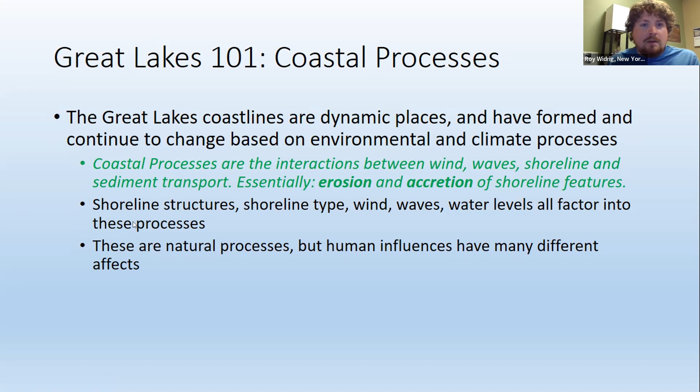and we'll move on. So why do these processes matter? Really, there's a lot of connections on the shoreline, both ecological and geological, and we want to conserve the shoreline environment to make sure that the processes are functioning as they should be, because what's happening at one shoreline is going to affect what's happening up and down drift. And when I say down drift, that's the way the sediment is usually moving along the shoreline. We want to maintain those processes. We want to limit a lot of other byproducts of these processes, such as wave deflection, scour at the base of structures, and so on.

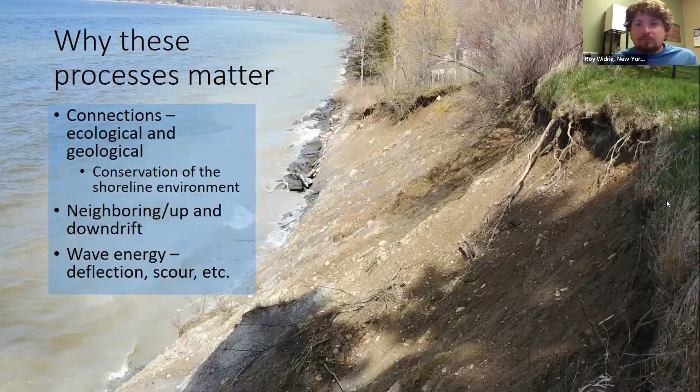So scour is usually that process where the waves come in, they hit a vertical wall and they kind of mine underneath or in front of the structure. So that's one thing we want to do, both for the structural integrity of the walls, if they are in place as a wall or other type of shoreline revetment, but also because by preventing scour, we can maintain a beach out in front of a property or a natural area.

When I refer to obstruction, I mean kind of what's in this upper left of the lower diagram there. When we build perpendicular out into the lake, we could often trap sediment in one area, and that means that down drift, not so much the current, but the process of down drift. But we want to make sure that all of the beaches and shorelines are receiving all that sediment. So that's a big factor.

Reflection is also very big, because when you have a situation where one stretch of property is protected by a large wall or revetment, neighboring properties can also see issues with that by receiving that reflected erosion. And when I do site visits with property owners, that's what I often see. Someone builds a wall, but the neighboring property starts to erode much quicker.

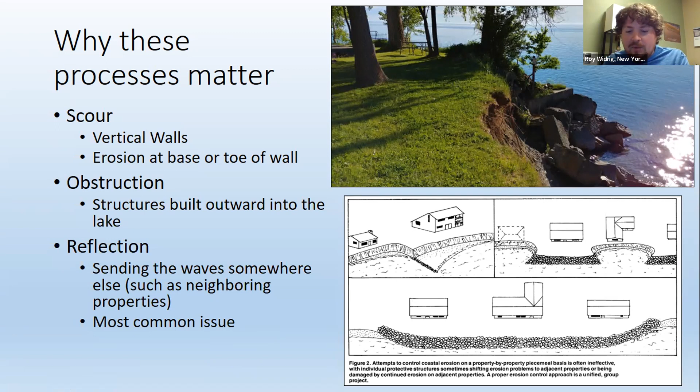All right, so we're going to talk about shoreline types, and this is really where my specialty is, the coastal geology and the processes, and how we want to maintain certain processes on the lake shore. So Lake Erie is really mostly known for, and what I see a lot of coming from the residents, is bedrock cliffs, mostly shale and kind of this limestone type sediments. The erosion resistance of these is very high where the rock is exposed. I don't see a whole lot of erosion of the rock itself, except for freeze thaw, cracking, and so on.

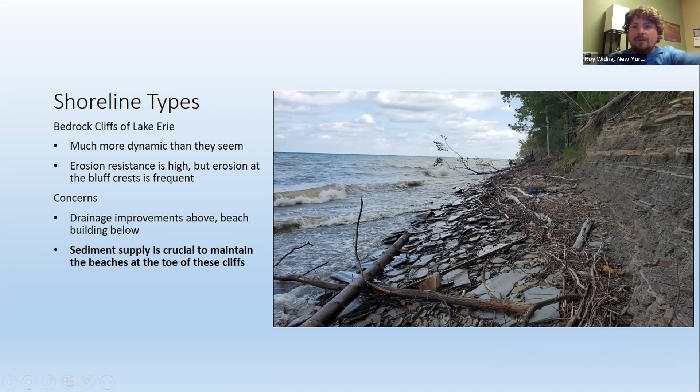But we do see and have seen, especially since 2019, a loss of the beach in front of these. A lot of cleaning up of these bluffs that used to be covered in sediment, and are now very much exposed to the lake's waves. But also, almost every site visit I've done on Lake Erie in the past 2 years has actually had issues above the shoreline, above the cliffs themselves, and the erosion's happening on the bluff on top of it. So we're really concerned with the neighboring properties in terms of the bedrock cliffs.

Bluffs, these can either be perched on top of the hard bedrock outcrops on the shoreline, or they could be, like we see here in Dunkirk, perched on top of actually a sandy shoreline. These are very common. We see a lot of erosion on these, especially during seiche events and high wind events and high water levels on Lake Erie. So this is where a lot of our concern is right now for the erosion that is happening. And as you can see, it tends to happen very quickly.

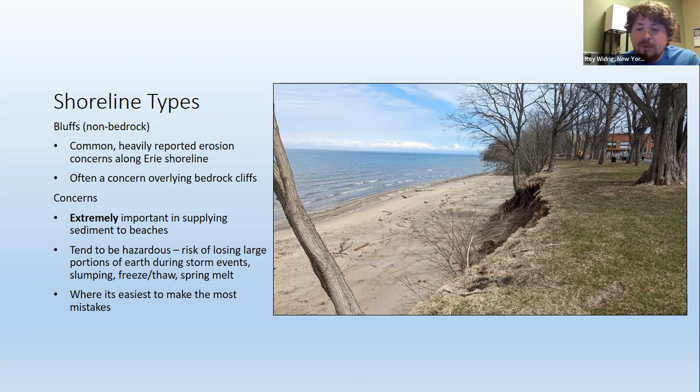It's a lot more dangerous to be, say, on top of this bluff and step out to the edge and there's an overhang. So they are a bit more hazardous than other situations, and they tend to be really storm-driven erosion events, and also winter weather. So a lot of freeze thaw, a lot of slow earth moving when the surface of those bluffs starts to freeze, and then they melt, and then they kind of slide down a little bit. We see this on both lakes, but especially quite a bit on Lake Erie lately.

This is really the same beach, just a little bit farther down, where it's actually more of a shaly, rocky area. These are pretty abundant as well. They're really a lot more dynamic than we give them credit for. They're also often associated with small streams and rivers. So I think some of the shoreline access parks that we have on Lake Erie often have a shore where a lot of the coarse sediment actually washes down from that, or it comes in from the lakeside. So pretty dynamic, and they're going to respond differently to different events in different ways.

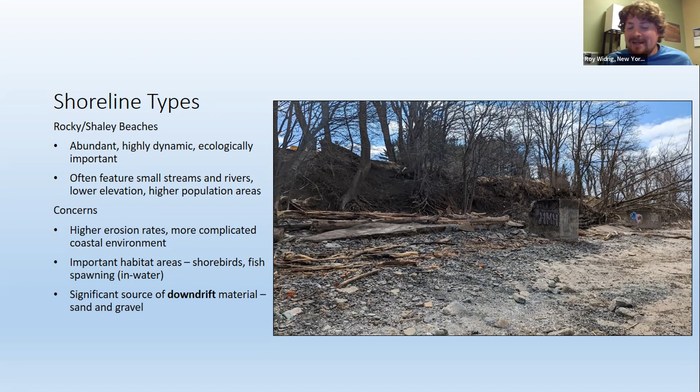So we tend to see higher erosion rates here, but they are also pretty important shoreline habitats for shoreline birds, fish spawning out into the water, not necessarily on the shoreline itself. But these are a large source of downdrift material. So a lot of the waves are pulling sediments off the beach and moving them farther down the lake shore. So they are very important for maintaining that sediment supply to the shoreline.

Also, and this is much more rare on Lake Erie, we do have shoreline types of sandy beaches and dunes. Again, these are very ecologically fragile, so we want to make sure that we have enough sediment to keep supplying these, but also know that they are supplying sediments back out to the lake that may maintain beaches farther down, which could be those shaly sandy beaches and not necessarily more dunes. Very vulnerable to losing a lot of sediment and putting itself many decades behind during these very intense erosion events. Very important coastal habitats for a lot of specific species.

and this tends to cause a lot of change in the shoreline environment. So when we think about these shoreline projects, we really want to make sure that if we are protecting an important asset from these Seiche events, are we planning for what they used to look like, or are we planning for them a little bit more often? And are we not just planning for them right at the shoreline interface, but are we planning for them upland as well? And I want to get into that in a little bit here.

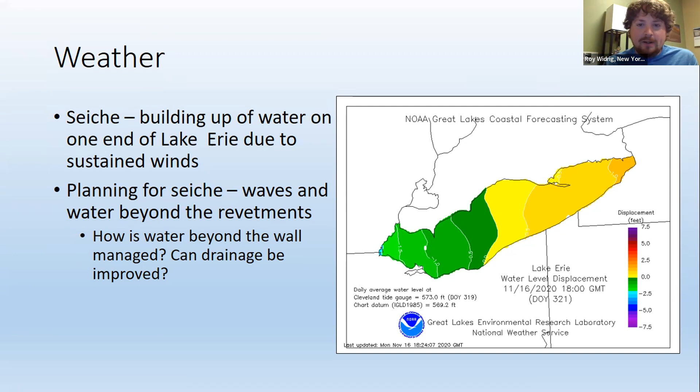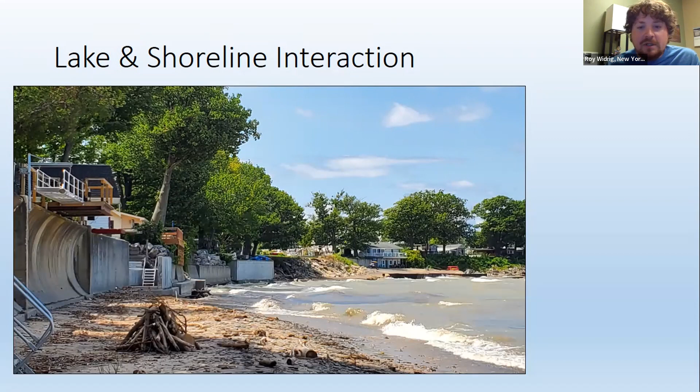So on Lake Erie, we have a ton of different ways in which we have pursued managing shoreline erosion. As you can see from this shot, we have curved walls, we have rock piles, we have cement poured walls, beaches. There's a lot going on, and we want to make sure that what we're selecting for certain areas is going to be most effective for those areas, and not just, my neighbor has this, so that's what I want to put in. And we want to make sure that they're reacting with the environment the way that they should be.

So this is an example from down in Chautauqua County, where there was an issue, not really an issue, but this really was just the dumping area. So I don't think any focus was put into what this was going to do, but by pouring this large cement waste material over the shoreline and into the lake, it actually caused an area where the waves were reflecting into an unprotected part of the shoreline and caused some significant erosion during the winter.

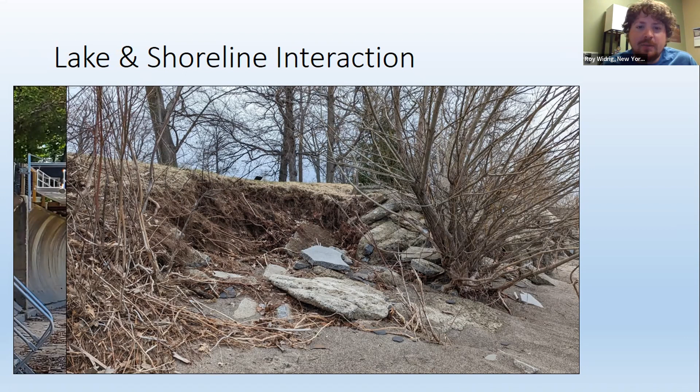I think it was actually last winter where this happened mostly. So a lot of these things take time to actually become exposed, but there's usually some sort of driver behind this. In this case, it was Seiche events, but also on top of that, high water levels as well.

I mentioned earlier that managing the water on top of the shoreline bluffs has become a really big issue. I would say more than 75% of the site visits I've done, the issue wasn't so much with the lake itself, but with the way water was being managed on top of these bluffs. So here's an example from about halfway down the New York portion of the lake, where there was a lot of water coming off Route 5, which was only about 50 feet behind where I was taking this picture.

And the water just flowed off in sheets. It overwhelmed the ditches and started to flow across the lawns. As you can see, there's also some tree removal here as well, so that doesn't help. But there's kind of this shoddy work done to try to get this drainage tile put in. Not really the best craftsmanship here,

but water was pooling on top of this and falling over the bluff on top of this shallow area and creating a really uncomfortable shoreline erosion situation where there's really no space for the homeowner to work with here. So this becomes a situation where we're not managing the erosion from the lake, but we're actually managing the water coming off the land and how that reacts with the environment.

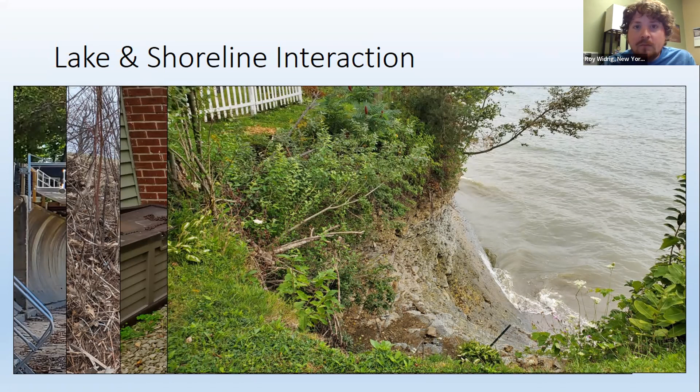So I do want to talk a little bit about long-term changes. As I've mentioned a few times, Seiche has been a lot worse in recent years.

So there are weather patterns that we need to discuss, how they're changing, and how that's going to impact the way we plan for shoreline erosion in the future. A couple of these events include heavier precipitation events. We've already seen this happen quite a bit, and that could lead to more of these upland erosion type events that are becoming a bit of an issue, and also the water storage issue of lawns. We want to make sure that they're being drained properly.

The freeze-thaw cycles in the winter. This is actually interesting because we're in like a third La Niña event, so a mild but also heavy precipitation winter in the Northeast. We get a lot of cases where the ground freezes, thaws, and that actually, in many cases, causes the bluff material to slide down quite often.

One thing we're not really sure what it's going to look like yet is a higher evapotranspiration in the summer. So it's much hotter and much windier in the summer. And that leads to potentially a drop in lake levels from just removing water from the lake, but also more wind and wave events, which are going to influence the shoreline more.

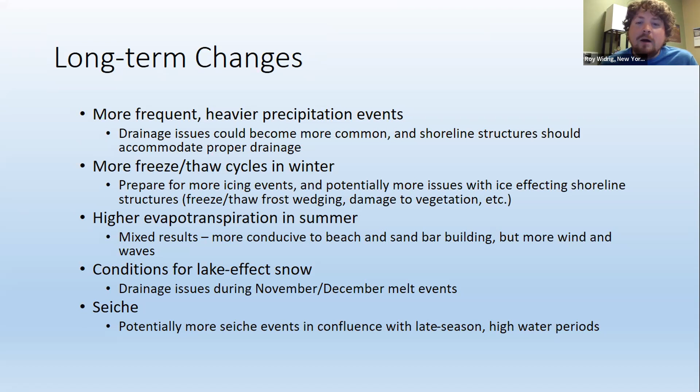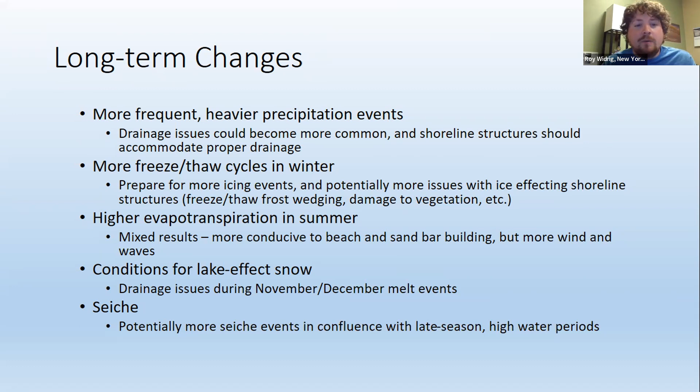Lake effect snow: we just got off a historical Western New York snowfall event. That water from that snow has to go somewhere. So when that melts, and when those events happen in November and December, where they probably will melt, it's not a whole lot of land to drain a whole lot of water at once. So that's something we want to keep an eye on. And as I mentioned earlier, seiche events as well.

So I do want to quickly get into resources that are currently available for contractors and how to access those. A lot of this is going to come out later, but I'll get right into it. Steve, hopefully we'll be able to talk about this a little bit later, but there are these new guides from the Army Corps of Engineers, the Engineering with Nature guides. These are really comprehensive ways to design shoreline projects which are much more environmentally sustainable, that maintain those shoreline processes a lot better than what we've done for the past 40 or 50 years. So that's the big one.

We also do have a Working with Nature guide through New York Sea Grant if you are going to pursue nature-based type solutions. There are some cases where we have a bedrock cliff. There's not a whole lot we can do with a few plantings here and there, but we do want to make this a little bit more prevalent in the way that we are thinking about shoreline management.

We have DOS, DEC, and Army Corps on the call today. So if there are resources of a certain type that you are looking for, please let us know, and we can either find those for you or we can work together to develop other resources that maybe do not exist quite yet. So feel free to contact the speakers, or if you want to go through me, my contact is at some point here. But if you all received an email from me, if you're registered, please just respond to me if there's something you would like to see, and we'll do our best to get that out or get it developed.

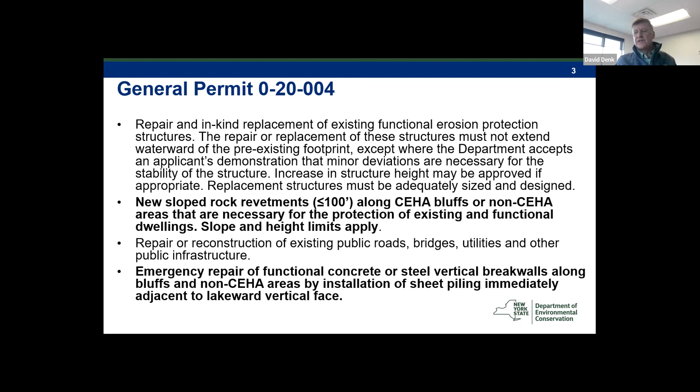Emergency repair of functional concrete or steel vertical break walls by installation of sheet piling immediately adjacent to the lakeward vertical face. So the refacement of existing vertical structures. Minor grading of scarped bluffs to create a stable slope. The project must include an approved vegetation plan to help the newly graded area to become stabilized. The use of toe stone may be allowed. Repair or reconstruction of docks, catwalks, and floats that were functional on April 1st, 2017.

Stabilization of existing functional storm damaged dwellings, decks, and walkways through the use of temporary bracing and pilings. Repair or reconstruction of elevated walkways or stairways necessary for water access. Removal of channel blockages on Lake Erie tributaries with upland disposal of removed materials. I'm sorry, that says Lake Ontario, it should say Lake Erie. Removal of debris by use of motorized equipment. So if your project fits one of these categories, that's great, and we can get you going through the general permit process.

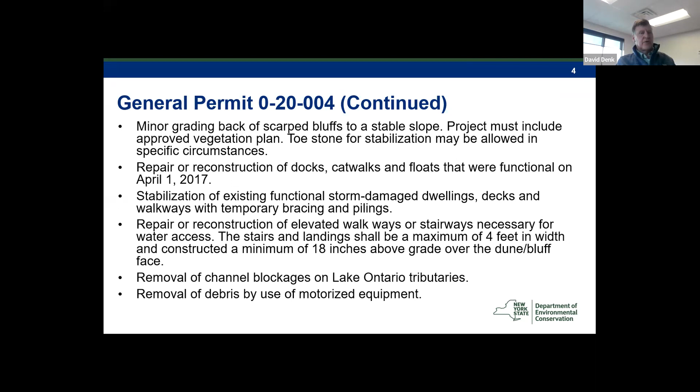So how do you apply? You would send by email or by regular mail to the regional DEC office a completed general permit application form, current photos of the project site. Photos before the damage occurred are also very helpful, and project plans. So both a site plan, that's like a top view, and a cross section of the project are necessary. Beth will be showing us a good example of project plans in her presentation, which is next. Like I mentioned before, if the project meets the general permit criteria, there is no need to send the application materials to the Corps or to Department of State.

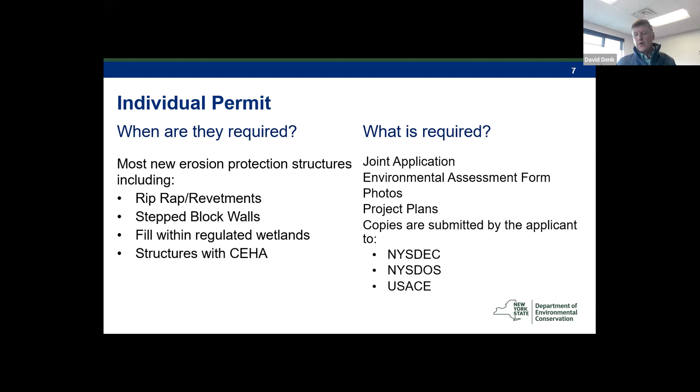It's more likely that the U.S. Army Corps of Engineers and DOS, Department of State, would also be involved. The application process can all be done online. If you go to the DEC website and search for coastal erosion application checklist, you'll get a page that has all the links you need to complete an application process. We would need the application form, the short environmental assessment form, current photos, and project plans.

Emergency authorization is the next type of authorization the DEC issues. Like I said, we've issued a number of these after high water events and seiche events, most notably after the Halloween storm a few years ago. So what do we need here? This is when there's an immediate threat to life, health, general welfare, property, or natural resources. DEC would be in a position to authorize only the minimum work necessary to overcome the emergency. That authorization would be good for 30 days and might be extended for another 30 days.

Emergency authorization is typically issued when there's been a major storm event, if somebody's house or boathouse or other structure is at risk of immediate failure. There's not a standard form to fill out for emergency authorization. We would need some sort of a letter or email explaining the emergency and a plan or description of what work is being proposed. If a structure is in danger of collapse without immediate intervention, please contact us as soon as possible, and we will work with you to get an emergency authorization.

So in addition to the coastal erosion regulations, Part 505 of the conservation regulations, protection of waters is another common permit type that's issued along the lake. For work in Lake Erie below the mean high water level, a protection of waters permit would also be required. Sometimes it's coastal erosion and a protection of waters permit issued at the same time. The protection of waters permit is issued in one of the three ways we discussed, the general permit, an individual permit, or an emergency authorization.

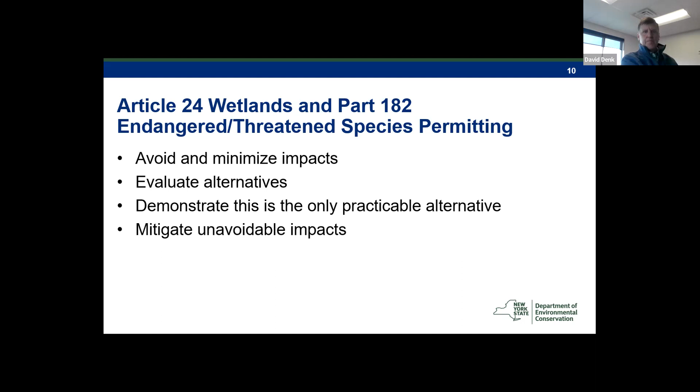Okay, can you hear me okay? Can hear you and I can see your slides.

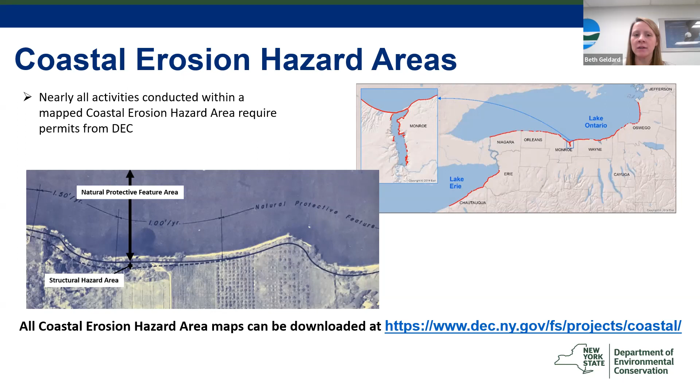All of the maps can be found at this link on the page. And again, nearly all activities are regulated within the coastal erosion hazard area. That includes all soil disturbance activities, even removal of vegetation, the construction of erosion protection structures, any building development, anything like that. You would need to contact DEC prior to conducting work. You'll likely need a permit.

Okay, now getting a little bit more in depth on the alternative analysis and the requirement for meeting our permit issuance standards. There's really four alternatives that need to be considered. The first is the no action alternative, which I don't have a photo showing, but really considering what would happen at the site should your project not occur. Is an erosion protection structure truly necessary at the site? If upland development is set pretty far back, is there a need to harden the shoreline immediately? Or can we continue to allow natural processes to continue for now?

If no action isn't an alternative that would work, then, thinking about it almost like a hierarchy, you would then go to your non-structural solutions. So if the shoreline needs to be protected to protect an upland structure, could that structure be moved away from areas of active erosion? Or if wave runup and flooding is an issue, could that structure be elevated to alleviate the issue?

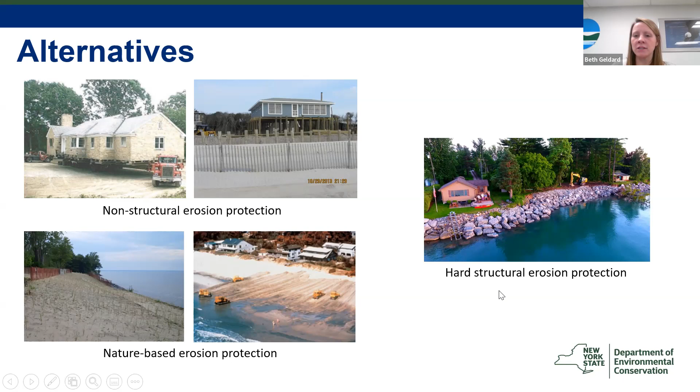Okay, permit application requirements. So I'm essentially going to go through almost like a checklist of what we look for when reviewing a permit application. I'll get into more depth about these when I go through the permit examples, so you can really see what we require for our review. So the first thing you would need to provide, that Dave Denk talked about previously, is a completed permit application form, whether that be your general permit application or your joint application, which is an individual permit essentially.

We would need a location map and aerial photo. That could be either Google Maps or Bing Maps, so we can get a good idea of where your project is in relation to other shoreline areas, other nearby shoreline structures, and so forth. We would need a stamped and signed survey to give us a pretty good idea of what structures exist at the site, and where the property boundaries are.

We would also look for a pretty detailed project description and details on how you meet our permit issuance standards. So we need to understand, when we're reviewing a project, why the project is needed at the site, what the issue is, what alternatives you considered, and why. So if you're proposing a more structural solution, we would need to know why softer and non-structural or even no action alternatives weren't evaluated or considered as part of this project.

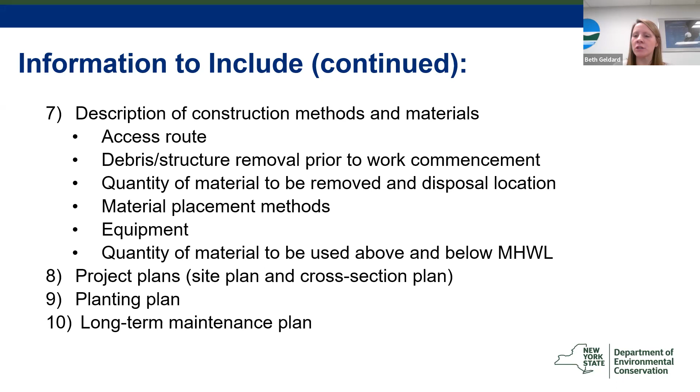If there's going to be any plantings done as part of the project, we would need a pretty detailed planting plan that describes the types of plant species to be planted and how they're going to be maintained. And then for structural erosion protection solutions, we would need a long-term maintenance plan that really identifies how often you're going to be inspecting your structure, what you're actually going to be inspecting for as far as deficiencies, and then how those repairs are going to be conducted to ensure your structure provides long-term protection.

Okay, so now I'm going to go through a permit application example that shows the level of detail that we really need to see when submitting an application. The site that was selected for this example is a site in the town of Richland in Oswego County. It's an area on a bluff. There's a bluff feature, and then there's also a beach. And there is an existing concrete break wall that has been destroyed over the years, but still sits on the beach. Besides that concrete wall, the remaining area on that property is not protected. So we would need the location map, an aerial photo, and then a property survey. And again, the location map can be either a Google or Bing map, identifying where the project is.

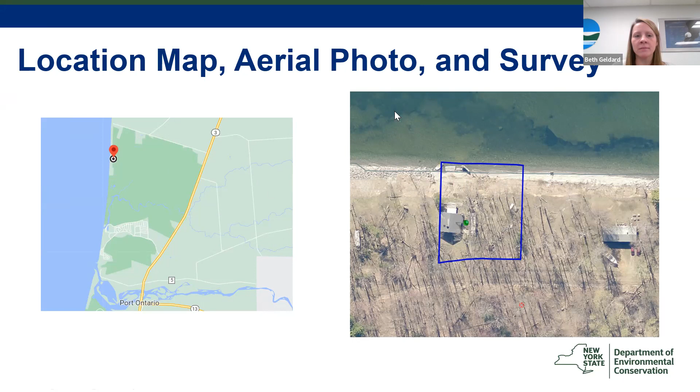Okay, so for this project specifically, a drone photo was provided, and it really clarified what the existing site conditions were. So there is an existing 3-foot high concrete wall that will be replaced with an 11-foot high stone revetment. The remaining top of bluff will be graded and planted with vegetation. The stone revetment will sit slightly closer to the bottom of bluff than the existing concrete wall, and all new material will be placed above mean high water.

So this project description gives a pretty clear understanding of what the existing conditions were and what the proposed structure will be. It'll be an 11-foot high stone revetment, and then above that will be graded and planted with vegetation. And then it also gives a really good description about where the new structure will be placed as it relates to the existing concrete wall and mean high water. And for all new structures, we do look to minimize lakeward encroachment to the greatest extent possible. So clearly stating this is very helpful for our review.

Okay, now getting into permit issuance standards, which would be a written description as part of the permit application. So your justification: the property has an existing concrete wall that has been overtopped and undermined due to high water and wave action. Prior to 2017, there was 28 feet of land between the house and edge of bluff. The high water has caused substantial erosion and has put the house at risk. The bluff is now near vertical and there is only 14 feet of land between the house and top edge of bluff. The stone revetment is needed to protect the house from damages caused by erosion.

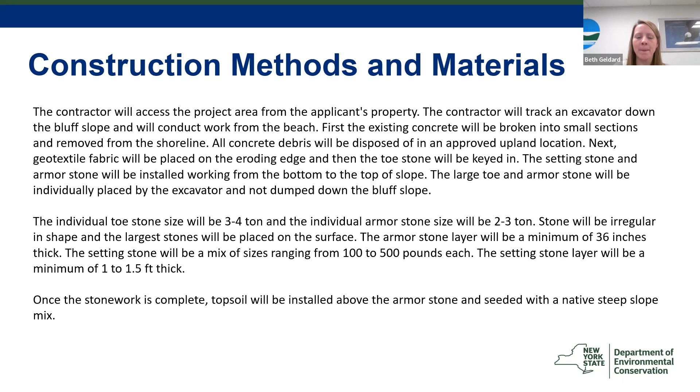Okay, and then once the stonework is complete, topsoil will be installed above the armor stone and seeded with native steep slope mix. So it basically describes start to finish how the work's going to be completed, what the materials are, and how that work's going to be conducted.

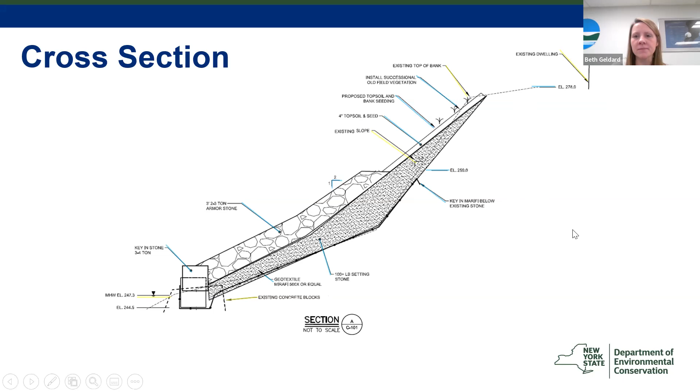Okay, and then for the plants, again, we do require a planting plan. So for this one, it says the bluff above the armor stone will be seeded with a native steep slope mix. The plantings will be maintained by watering and weeding to ensure they become well established. Planting areas that do not survive will be revegetated until they become well established.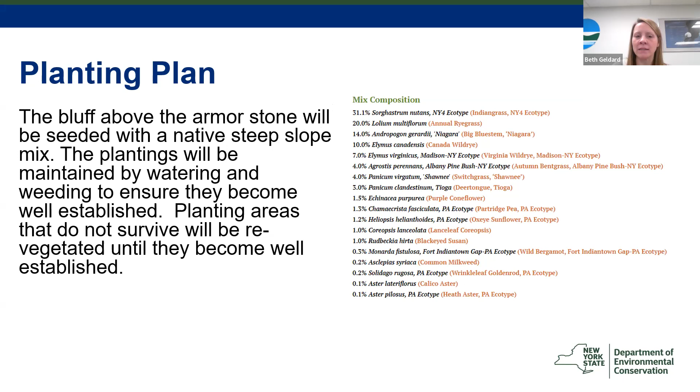So as part of the planting plan, we would require the specific seed mix of what you're going to be planting. We need to ensure that they are all native to New York, and also that they are mixes that would do well on the coastline. We want to ensure that what you're planting will become well established.

Okay, and then for the long-term maintenance plan, again, it's required for any erosion protection structure. The construction, modification, or restoration of an erosion protection structure requires a new long-term maintenance plan. So for this one specifically, the permittee shall periodically inspect the revetment at least once per month and after large storms. Inspections should look for evidence of moved or slipped material, flanking, scour, exposed fabric, or drainage issues. If stones have shifted, the permittee shall contact the engineer and contractor to provide required repairs. The DEC shall be contacted prior to making repairs.

So it identifies how often the project is going to be inspected, what deficiencies are going to be inspected, and, should there be any damages, how those repairs are going to be made. And contacting DEC prior to making repairs is always recommended.

There are certain normal maintenance activities where you may not need a permit, but when working anywhere below mean high water, or, oftentimes repairs are much more extensive than normal maintenance. So we would need to reissue a permit at that point. So please contact us prior to making any repairs, just so we can see exactly what you need in order to move forward with the repairs.

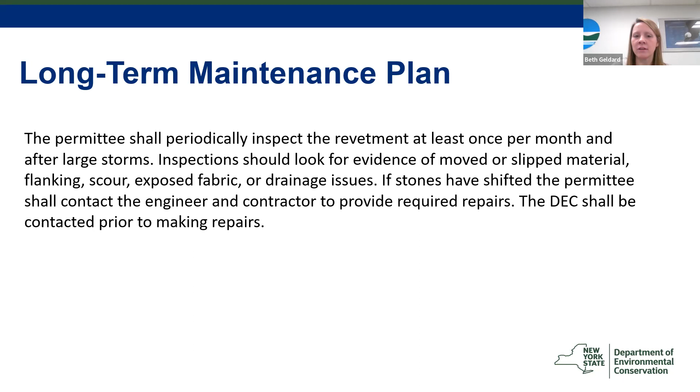Okay, and then once you submit a permit application and we conduct our review, there is most often additional information that's required on the project plans, or as far as the alternative analysis and justification for the project. It really is uncommon to receive an application that is 100% complete. However, I would just stress, do your best, provide as much application or project information as you can. It really does help with our review and limits the amount of comments that we have following our review.

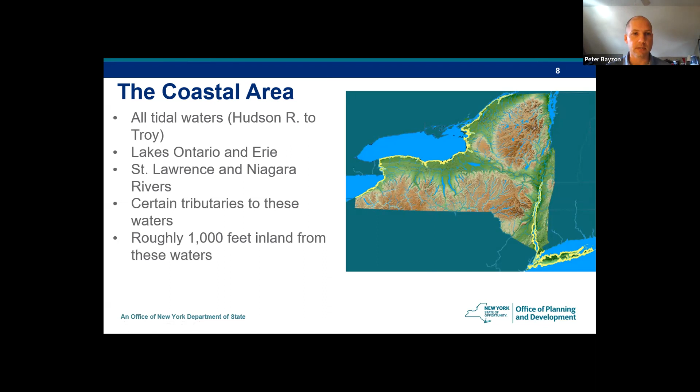So the applicant for a federal permit on the list must certify that they will conduct the activity in a manner that's fully consistent with all of the 44 policies, unless they're located within a local waterfront revitalization program, in which the local community will have a more specific sub-policy potentially for that project. And there is no balancing with these policies, so one policy is not more important than the other. So all of the policies have to be met and found consistent for the particular project that we have.

The Department of State has a 6-month review period to complete our review of the project application. Now that can be delayed a little bit if more time is needed for the applicant to submit additional information to the state, and we can enter into a stay agreement, which would basically pause the clock and allow the applicant to provide that information to us. And if a project isn't found consistent through the Department of State, an objection would be issued. And if an objection is issued, the federal agency cannot authorize the activity. Okay.

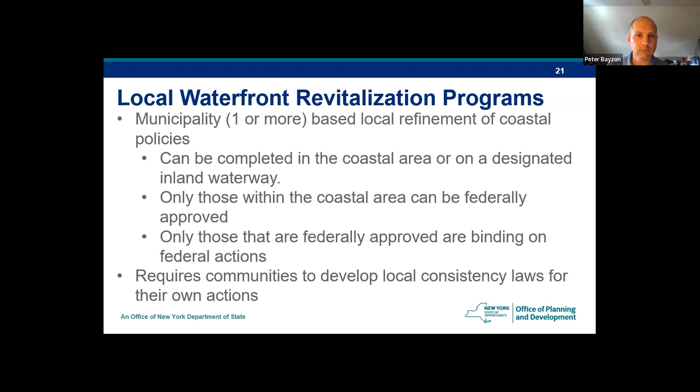And also, when we're reviewing a project, we contact the LWRP to determine if they found the project consistent or not. So we also are working hand in hand with the town or village on a project.

And why these local waterfront revitalization program areas are so important is that it gives municipalities the ability to affect federal decisioning. So these municipalities, and there's multiple ones throughout the state, have made the affirmative choice that they want to have some type of effect over federal processes in their municipality. And it's one of the few ways where local communities can really affect federal decisioning.

There's also the significant coastal fish and wildlife habitats, and these are located again throughout the state. These are areas designated by the Department of State upon recommendations from the DEC for specific characteristics. And these are habitat improvement projects that we want to make sure that all the habitats for these local areas are kept, upheld, and protected throughout the state. The whole habitat is considered, not just an individual species. And policy 7 of the 44 is part of the process for all significant fish and wildlife habitats.

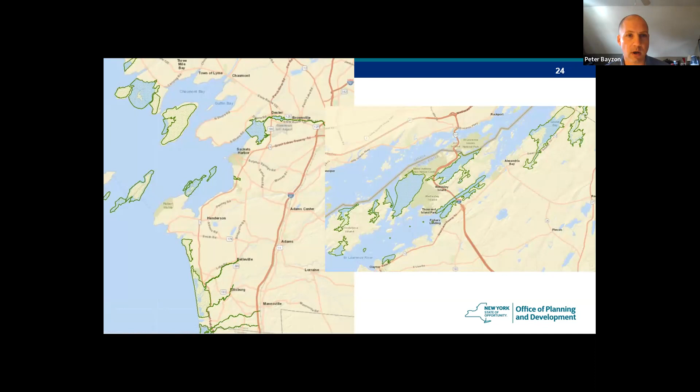And there's also the scenic areas of statewide significance, or SASS. These are indicating and protecting the visibility of a local area, but they're only located in the Hudson Valley or East Hampton, so they wouldn't be any place out in the Great Lakes at this moment.

Here's just a nice resource of where you can find all the local areas, whether it's in an LWRP or a significant fish and wildlife habitat, or in a SASS. You can visit the Gateway information link located right here. We can share this at the end of the presentation if needed. And so it'll show you your spot and whether you need to identify that spot or not.

Here's just some other useful links that we would need for our application, or if you're submitting to us. The FCAF is the first link. That would be that 3-page document that we need specifically for Department of State review, along with all the other information. It also has the coastal management program policies. So if you do check yes to one of those policies that you're potentially affecting, that link will show you where those policies are and how you need to make sure you are consistent with those policies.

And just to point out here, we will accept your application materials by email. And that last line shows the email address you should be sending materials to if you choose to submit by email. All right, and there's our contact information.

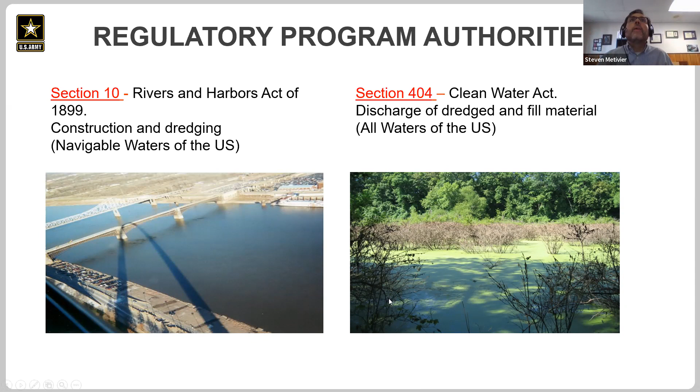Under Section 10, we require permits for any work in, over, or under a navigable water. Again, let's look at Lake Erie, pieces of Cattaraugus Creek down there, the Buffalo River, in that part of the world is Section 10. And so any structure, work in, above or below, that'd be dredging, that'd be open pile docks, any kind of structural thing that you're doing there that's in the water. And we'll get to that next slide.

Section 404 applies to all waters of the United States. So that would be the big waters and little waters and wetlands, those kinds of things. But it regulates a much narrower band of activities. The activities that are regulated is discharge of dredged or fill material.

So what's a dredged or fill material? Well, where we're talking about today, riprap, armor stone, any kind of fill material along the shoreline for bank stabilization, that'd be Section 404. And if you're building a crib dock, for example, and you're filling those cribs with rocks, that'd be a fill under Section 404 of the Clean Water Act. So a couple of different laws that have some overlap in big waters like this.

So our jurisdiction lives, and I'm not going to talk about tidal waters, but we live in fresh waters here, and we live for the big waters. And again, we'll talk to Lake Erie here. We live from the ordinary high water mark waterward. So ordinary high water is where the water gets to on an annual or reasonable time, every other year. Effectively that's ordinary high water, and you can see it on the bank. If you've got a bulkhead in the water, you'll be able to see that line on the bulkhead, and that's pretty close to ordinary high water.

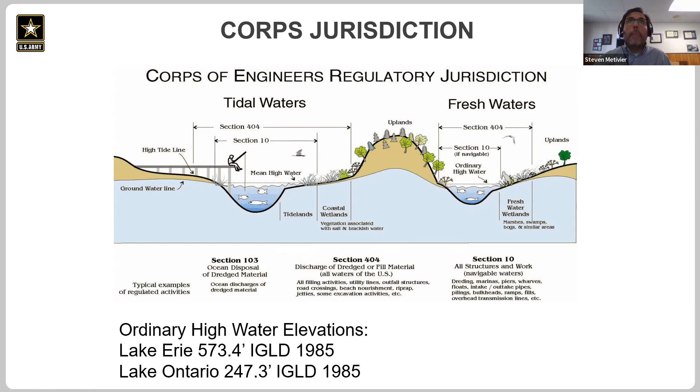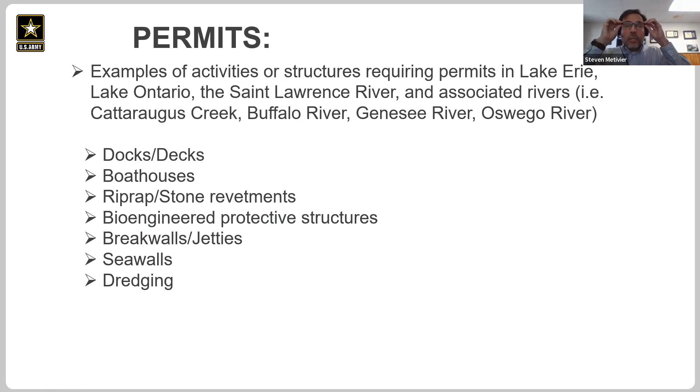So what kind of things do we regulate in this part of the world? And we're going to stay along the shoreline because that's what we're doing today. Things like docks, decks, boathouses, stone riprap revetments, bioengineered protective structures, breakwalls, jetties, seawalls, dredging, all those kinds of things are things that show up as things that need permits from the Corps of Engineers.

So we have some different kinds of permits that we play with. There's two kinds: individual and general. And you want to stay over here as much as you can in the general permits area. Individual permits, if the project is what it is, then we deal with individual permits, but general permits are where we want to go, and we'll get to that in a minute.

So under individual permits, there's two kinds. First is the standard individual permit. This is the one that they wrote in the regs back in 1977 when they first started with the Clean Water Act and the Corps 404 stuff. It was also part of, before that was Section 10. We would do a standard individual permit. This is what they wrote up, and it's public notice. It's a 15 or 30-day public notice.

We coordinate with involved agencies, interested parties. There's a general public component. We do a full public interest review, and it takes some time, 120 days from the receipt of complete application. I think you heard from the other agencies that often we don't get an actual complete application the first time around, and that's okay. You know, we do the best we can, but 120 days from the time we get a complete application. And I'll be honest with you, if it's a big individual permit, we may not hit that 120 days. We'd like to, but we may not.

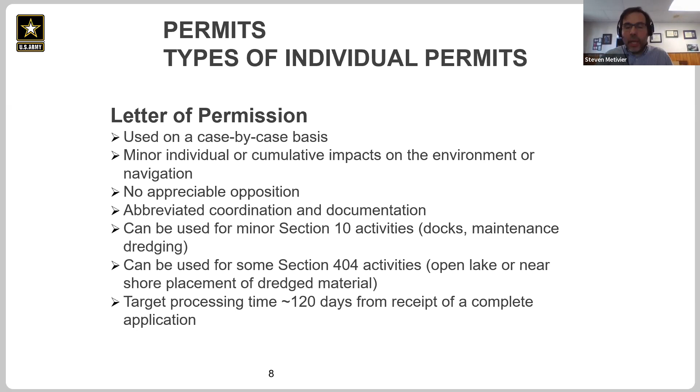Sometimes we can use the open lake disposal areas. So those are things that we can authorize under a letter of permission. Again, the target processing time is 120 days from a complete application. Much more likely we're going to hit that with a letter of permission than we will with a standard permit. So those are the individual permits that we've got.

General permits. So these are cool, and this is where you want to be. They're for established categories of activities. A lot less time to get through. 60 days from complete application, and some don't even require notification to the Corps. And how cool is that? That's kind of the best of all worlds, isn't it? And so some things about this: they have to have minimal individual, cumulative, or environmental impacts. So that's an important thing about general permits.

There's three kinds of general permits: regional permits, nationwide permits, and programmatic general permits. So regional permits are issued by the district. Our district commander will issue them, and I'll go through a couple of examples for our part of the world. And think of general permits as a box. We create this box, and anything that fits in the box is authorized. We're authorizing the box, and all you're doing is using that box.

So we can have boxes created on a regional level or on a nationwide level. This happens every 5 years. We issue nationwide permits, or it can be issued in partnership with the state. We're currently working on one with New York State DEC, where the DEC and the Corps could both say it's okay for the same thing, kind of a one-stop shop. Not going to talk too much about that one right now. We'll see that as it comes by. But I did want to talk about the nationwide permits. Let's go the other way.

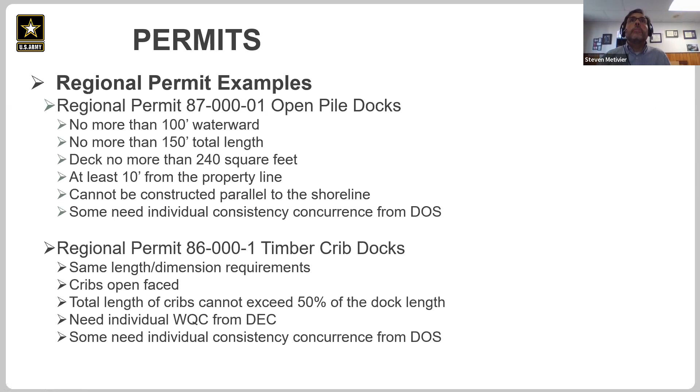We'll talk about that in a minute. And some will need individual concurrence from New York State Department of State. So where's my nationwide permits? There we go. So nationwide permits, that's the second one on the list. And these are issued every 5 years at headquarters level, and they're very specific for activities.

For example, nationwide 3, oops, come back. Nationwide 3 for repair or rehabilitation of existing currently serviceable structures or fills. Minor deviations are allowed. You can repair it if it was damaged as a result of a discrete event, a flood, storm, something like that.

Nationwide 13 is bank stabilization for erosion control, and anything less than or equal to, it shouldn't say greater than or equal, it should be less than or equal to 500 linear feet and 1 cubic yard of material per running foot of bank. And no work in wetlands, again, that can be waived, but in general, we don't want to have that. In general, if you're working in wetlands, you probably don't need bank stabilization.

And then nationwide 19 was little tiny dredging of no more than 25 cubic yards of material and no work in wetlands. So these are kind of examples of what the nationwides are. We have 56 of them, I think, at this point, but the ones you're going to run into on the lake are pretty much these.

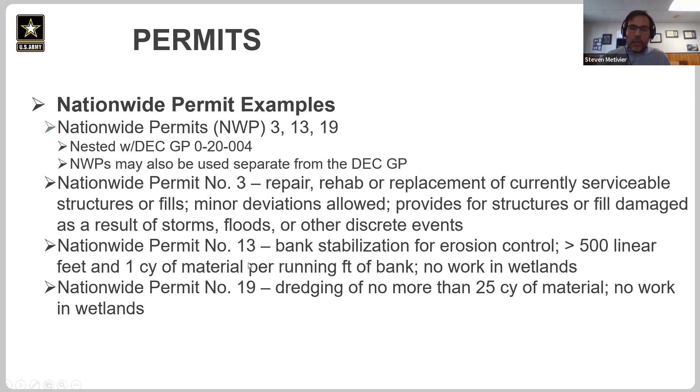And we nested these 3, 13 and 19 with the state GP that Dave Dang talked about earlier on, and for a lot of your shoreline work, this is where you want to live. If you can possibly make it happen, this is where you want to live. Is this DEC GP? Because as Dave said, most of the time you don't need to even talk to us at the Corps of Engineers, and Department of State has concurred with their consistency on some of those things.

But there are some exceptions for that, and I'll drag you all the way down to F here, because the first ones have to do with endangered species, and all for Lake Ontario, Oswego County, and Cayuga County, and those were up in the Thousand Islands. So we're talking about Lake Erie today, so we'll just skip those.

We'll get to F, which is projects that involve placement of stone below mean high water in excess of an average of 1 cubic yard per running foot of shoreline. Those you need to come to us. You need to send an application in, even if it looks like it might be authorized under the GP. So that's kind of the big one. And for that one, you also have to send it to Department of State for their concurrence.

But most of the time you want to live under this one, and most of the time I think you're going to be able to. You know, where you're not going to be able to do those are those new revetments, new structures, those kinds of things, as Beth was talking about. So things that have to happen with the federal government. I'm running out of time, so I'm going to be quick here.

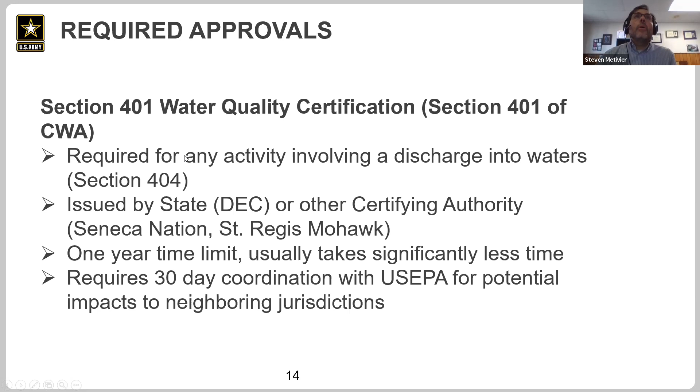I don't think anybody here is doing that, but it's a 1-year time limit. Usually takes a lot less time than that, and then after it's issued, it requires a 30-day coordination with the US EPA for potential impacts to neighboring jurisdictions. Now, I could spend all day talking about 401. The key is, if you need it, you need to be talking to New York State DEC pretty early on. And how do I know I need it? If it's not one of these, and you're in the coastal erosion hazard area, you need a water quality cert.

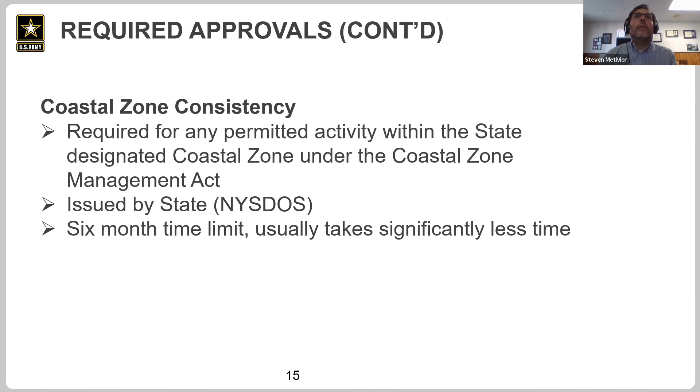Coastal consistency, I don't need to do that. Matt and Peter did a great job with that. So some required information we need, and Beth did a fabulous job walking through some of these things. So applicant impact. So important things I'm just going to point out. Total area of impact, square feet or acres below OHW. Very important to have that.

Total volume of dredged or fill material. Going to dredge 1,500 cubic yards? Say I'm going to dredge 1,500 cubic yards. Sign the application. We get a bunch that aren't signed all the time. So if you're a contractor, you're signing, but also the applicant is signing that one as well. So make sure your joint application is signed.

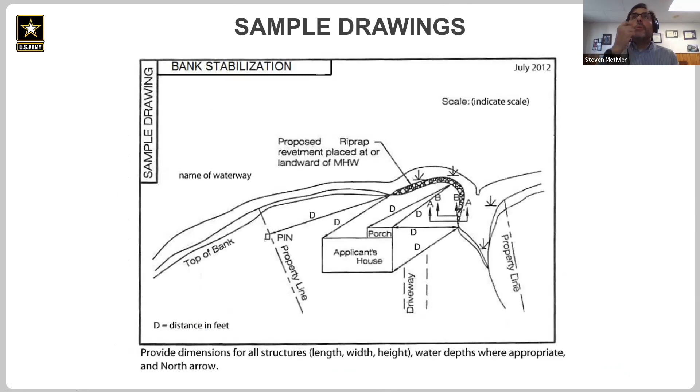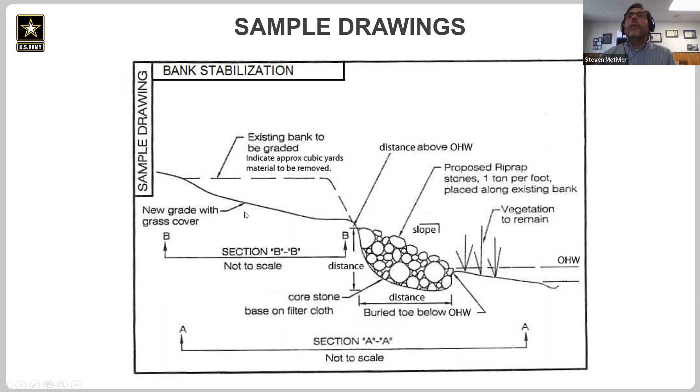So bank stabilization. So things that we need to have. Again, this is a cross section. If you're going to grade the bank, what is it going to look like? Distance above OHW. So where does the Corps regulate? We regulate this little piece, anything that's waterward of where this line is. This OHW gets to the shoreline, and so anything above that, we're out. DEC can be in. Anything below that, and we are in.

Again, another more engineered drawing. They don't have to be engineered, but they should be legible, and you should be able to know the width of the fill, the depth of the fill from OHW. What are you looking at? Really, when I'm talking about how many cubic yards are below OHW, that's what I'm looking at: this quadrilateral below OHW. This part up here is interesting, but we don't regulate it. We only regulate what's below OHW.

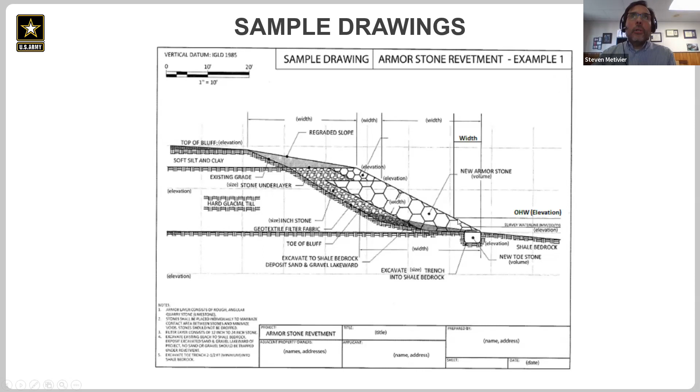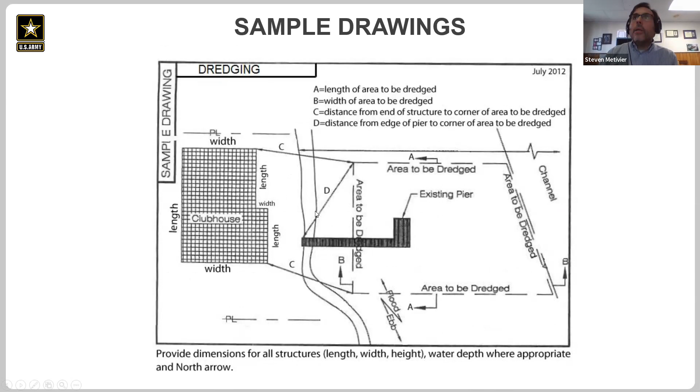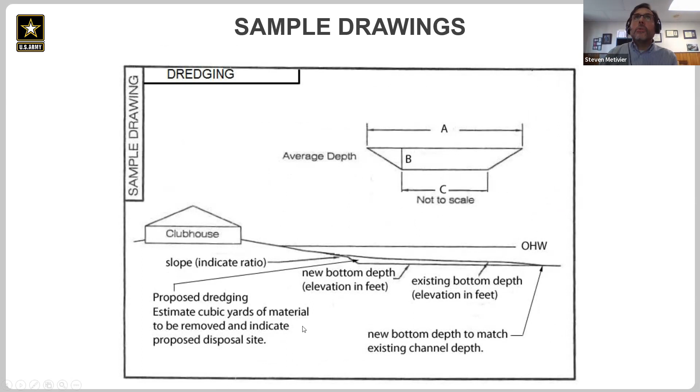Other sample drawings. If you've got a dock, here's an area to be dredged. The dock, where are the property lines, distance from the property lines, and then a cross section for that. If you're dredging, what's the new bottom depth? I need an elevation in the bottom, existing elevation, proposed elevation, a cross section. And then where you're going to put it. So those are things, and again, I'm going to just breeze through those. And with that, I'm out, and I will toss it back to Roy.

All right. Thank you very much, Steve. But also thank you, Beth, Peter, David, Matt, everybody that contributed to this today. Very appreciative. I don't want to say this was really the CliffsNotes version of shoreline permitting, but it is a very complex thing, and hopefully we got a fair amount of information across to you today.